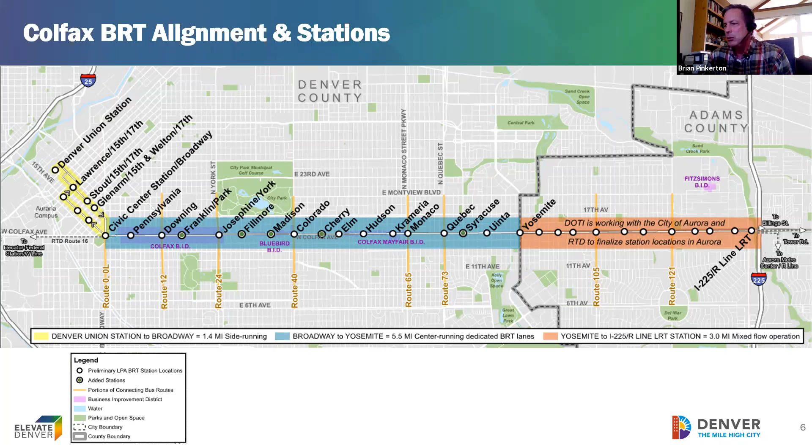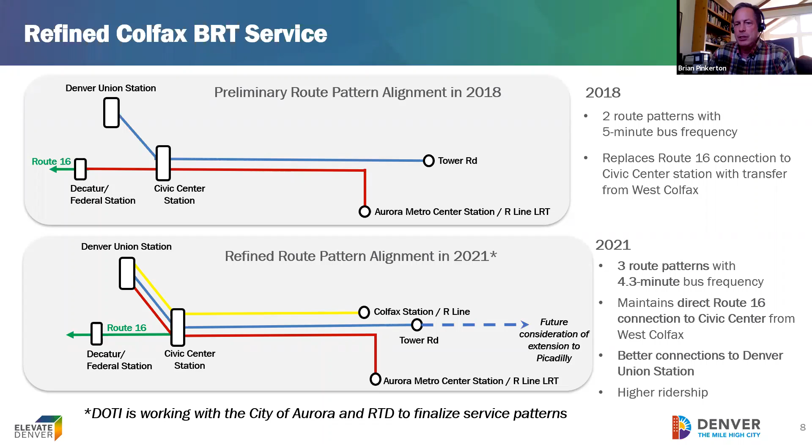Go ahead and put the next graphic in there. You can see now that the Colfax BRT will have 3 destinations in Aurora: at the R line at Tower Road with future consideration of an extension to Piccadilly, and at the Aurora Metro Center Station. All 3 of those lines on the west end terminate at Denver Union Station, and Route 16 covers that traffic to the west.

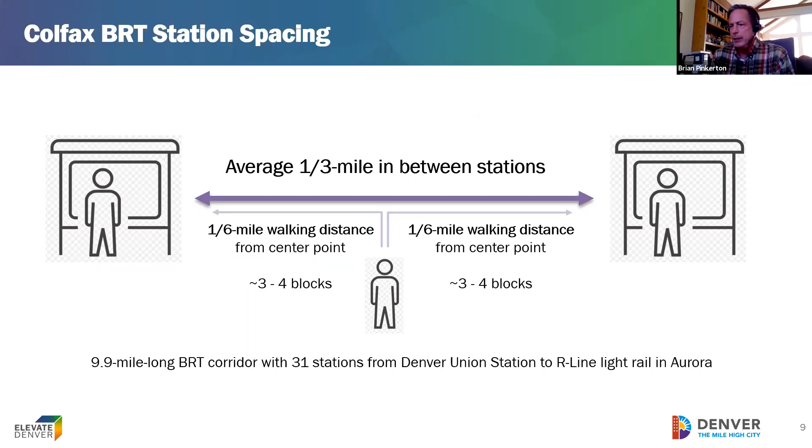Again, we've covered this, but in the center running section, it was very important to us to have a reasonable distance between stations. There are other considerations too, like whether there's a north-south route at the location that makes sense to connect to, or a signal at the intersection so traffic can stop, which is very beneficial to a station location. But in general, it's about an average of a 1/3 mile between stations, meaning a 1/6 mile. If you walk to Colfax or get there somehow and end up halfway between stations, you're only about 3 or 4 blocks in either direction to a station.

There are 31 stations between Denver Union Station and the border. Span of service is 24 hours a day, 7 days a week. The frequency during the day would be approximately every 4.3 minutes on average. At nighttime, it would expand to a 20 to 30 minute headway.

Miles, did you want to cover this one? Yeah, Brian, I'm happy to.

And that concept went into the center running format and brought us to where we are today, which will really start to identify the concepts, the engineering, the environmental work that needs to happen. Then as we move into the 2022 timeframe, looking at coordination with the FTA on some of the small starts funding components, and looking at final design within the 2023, 2024 timeframe.

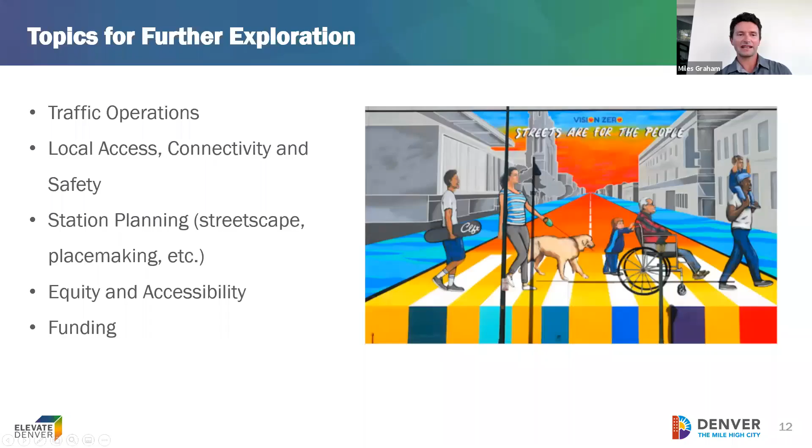Alex, thanks for buying me a little time. There were some chats coming in. A really good question about being interested in learning more about safety, especially with regard to having the stations in the center of the street, which can be a little more counterintuitive. But Sid, if we back up a few slides to the overview graphic that Brian was just talking about, you'll see that by having the center running stations, it will actually shorten crossing distance. If we go one more slide, it will actually prevent folks from having to cross all of Colfax at one time. It will create a refuge for people crossing the street to pause in a very safe center island station before completing their trip across, which will improve connectivity across Colfax, which right now can be a challenging street to cross at times. The designs we're going to look at tonight will really illustrate in a visual way how those center stations will function so they are safe and feel comfortable, because it's a concept we don't have a model for in Denver. So the visual, the image, speaks a thousand words.

We'll be able to talk more about the safety components, but this design does prioritize safety for all users. As you can see, it creates signals where people are allowed to turn left instead of having the free left turns you'll see on Colfax today. Left turns are one of the leading causes of vehicle crashes, so that's a key component to this plan as well. Taking the buses into a dedicated lane in the center will reduce conflicts between parking on the side of the street and the current bus service that runs on the side with vehicle traffic today. So a lot of different components that will improve safety.

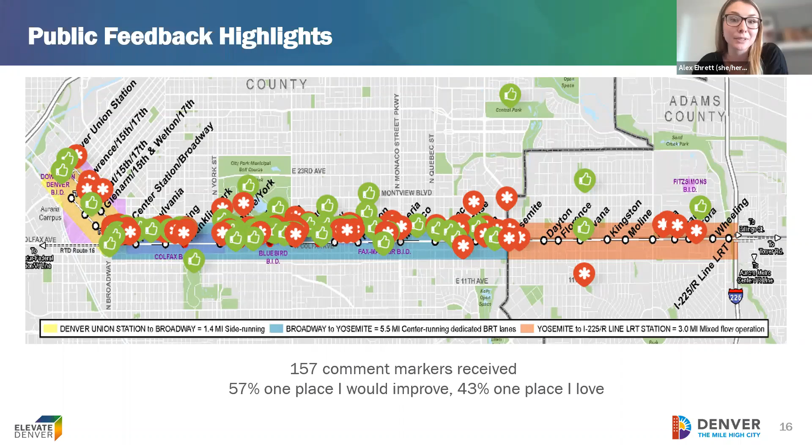Go to the next slide. If you took the survey, you know that in addition to standard multiple choice questions, we also have a map where you could place a marker of a place you'd like to improve and a place that you love. We've received 157 comment markers, and the split is about 57% places you'd like to improve and 43% places that you love. So we can dive into what these actually were flagging.

So what you love, there is of course a ton of strong support for the local businesses. A lot of those specific locations were places where cafes, restaurants, shops, or theaters are located, and a lot of that was really emphasized between Josephine and Madison stations. In addition, people really supported a lot of the existing bike lanes and pedestrian improvements where they have been made, calling out the Syracuse, Pennsylvania, Josephine, and Fillmore intersections. There was also a lot of support for the proximity to amenities and services that the current bus service provides and the connections currently available.

In terms of where you'd like to see improvements, there was overall a desire to improve traffic flow, especially pedestrian and cyclist safety in many locations. Some people indicated they'd actually had an accident at a location, or didn't feel safe crossing the street, and that's incredible feedback for us, very helpful. There were some of those intersections called out that you see on the screen. There's also a strong interest in streetscaping, with specific locations where there seemed to be opportunities for enhanced lighting, improved bus shelters, and placemaking elements.

Some of these locations were identified as, you know, this isn't a great place to wait for a bus, I don't feel super safe here, or this specific shelter doesn't provide very good protection from the weather. So all of that feedback has been helpful for those specific locations identified, a couple being Krameria, Monaco, and the Syracuse stations.

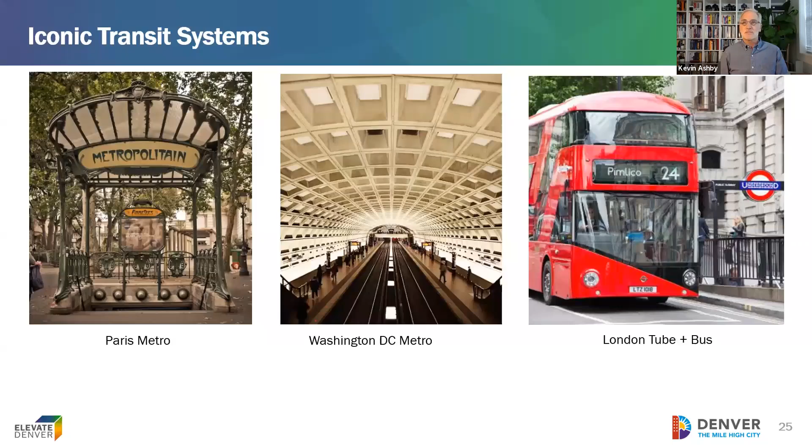Again, maybe not get into all the details here, but there's been a tremendous amount of input that's informed the designs as we've developed them so far. So some of the real key concerns that we heard a little bit earlier, shelters for protection, will demonstrate that, I think. Lighting and security are key.

Information, and also the connection that this will create for a number of neighborhoods, as well as the 2 cities that it connects. And I'm always inspired because if you think about using public transit, you literally use half the amount of energy when you ride the bus versus using a private car. So the more we can make this enticing and comfortable for people, the more successful it will be.

Again, some of the design objectives that we've touched on in the previous slides, but what's really important, I think, is creating a great user experience for everyone in the community with this project.

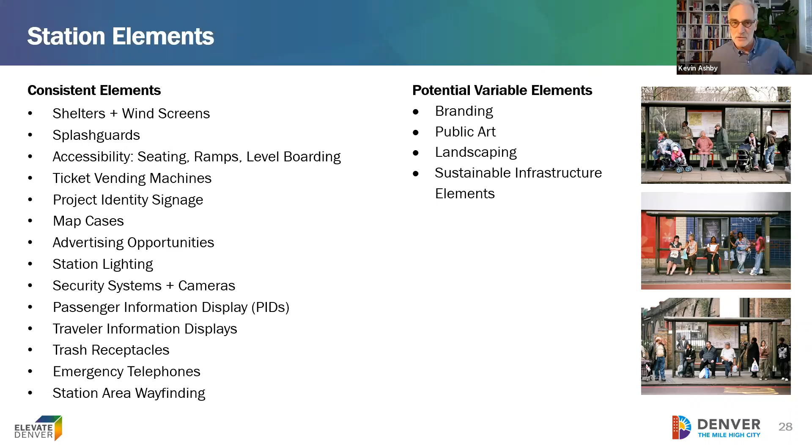Building off of what Kevin shared in terms of what elements could potentially be variable in the design, we know this is something communities are likely to be excited about. So we wanted to ask a poll question: what station elements would you be most eager to customize in your local area? The options are branding, public art, landscaping, or sustainable infrastructure elements.

Just around 56% of you have participated so far. We'll give everyone a couple more seconds, and then I'll share the results. Right now it's looking like public art is coming out ahead.

Thanks to everyone who participated. I'll share those results now. It's a bit split - I think people are really excited about the public art opportunity as well as sustainable infrastructure elements and landscaping. We'll have more to come on branding, but this is helpful for us. Thank you to all who participated.

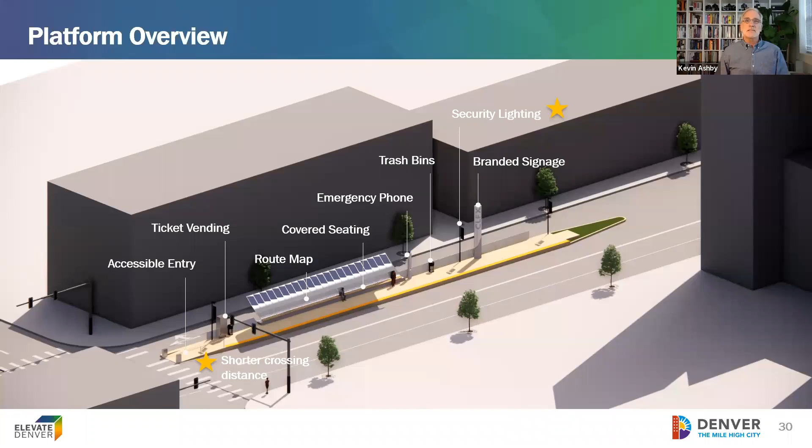As we were developing the themes, we wanted to tap into our unique place in the world. So the thematic ideas were built on the region, on the cities, Aurora and Denver, and then on Colfax Avenue itself. We developed these themes hoping they resonate with people and are evident, so that when people are riding this BRT, they know it's part of our community, our city, and our region.

We had 3 themes that we developed, and I'll describe them in more detail as we get into them. One was Rewind, which looks at the history of Colfax. The second was Rays of Light, picking up on the idea that Denver is one of the sunniest cities in the United States. And then also Playful Landmarks. These are pretty broad, but they allow a lot of latitude as we've been developing station ideas.

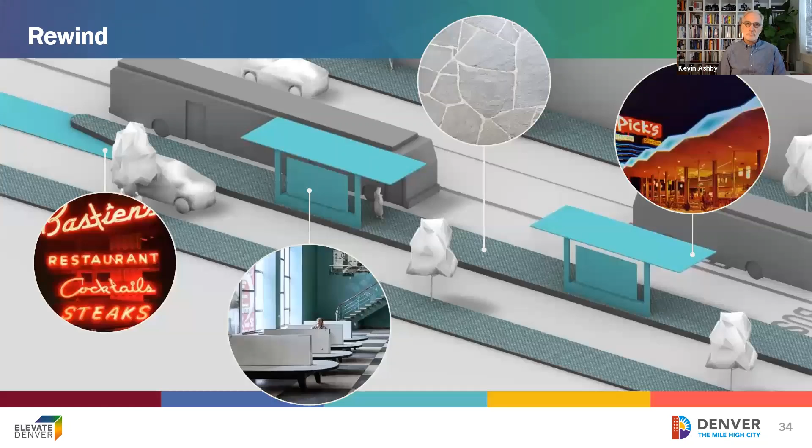The notion of Rewind acknowledges the history, celebrates movement, since Colfax has always been about moving towards the west, and the transitions that have taken place over time in Colfax. At the same time it begins to look at modern architectural ideas. This is very abstract, but there's a lot of materials we'll be looking at in terms of steel, concrete, stone, wood, glass - all those things are really open here. Today I want to emphasize that all of our studies are still sort of white and abstract. There's some materiality implied, but we haven't really gotten down and fine-tuned that yet. We haven't begun to look at color and those sorts of things yet, because I think those will tie in very much with branding at the end of the day. So we're working through that.

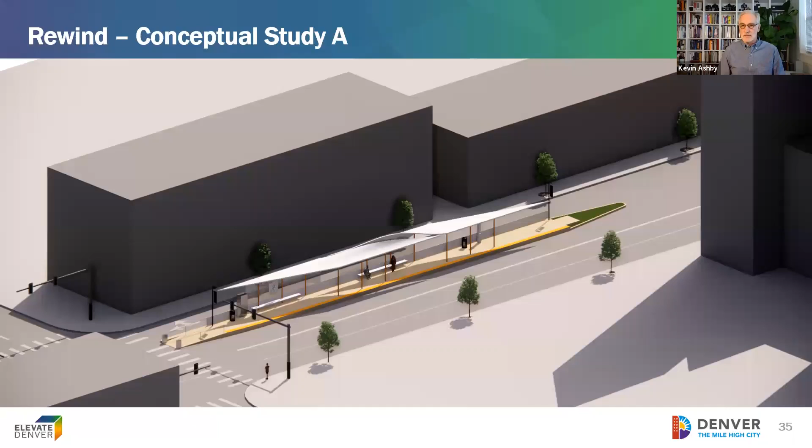So our first option, conceptual study A, has a very strong roof form. It's linear, suggesting movement and transition. It's also highly modular, so we can make the canopies longer or shorter based on the particular activity in a given station.

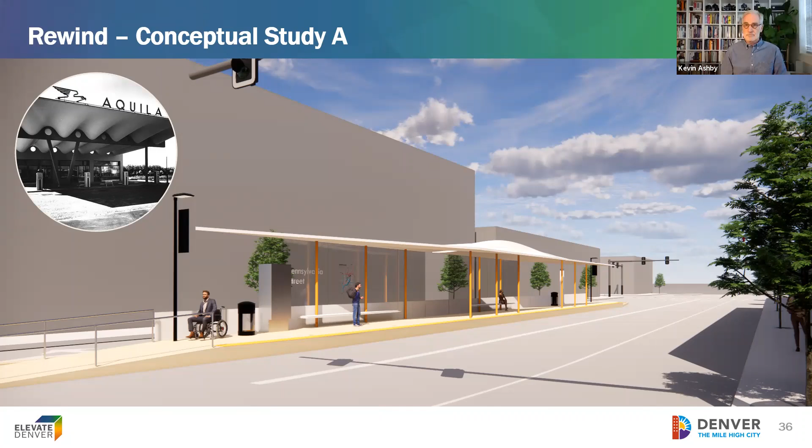This is looking as if you're coming across the crosswalk up onto the canopy. You can see there's a really good amount of protection from sun, rain, snow, sleet. We've got windscreens all along the back side of the canopy and splash guards all along there as well. So it's very open and secure feeling, but at the same time provides a great deal of protection. That's something you'll see in most of the solutions, actually all of the solutions.

This is looking now to the west. We haven't modeled all the background yet, we're still keeping things abstract, but if you know the city, you'll know this is Pennsylvania Street. So you see how these two canopies relate and create a dialogue across the intersection. It's almost like, in this case, these are sort of clouds moving down through the avenue.

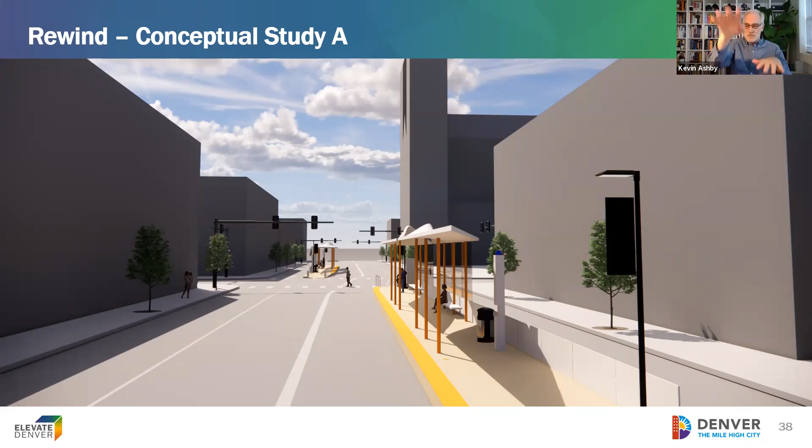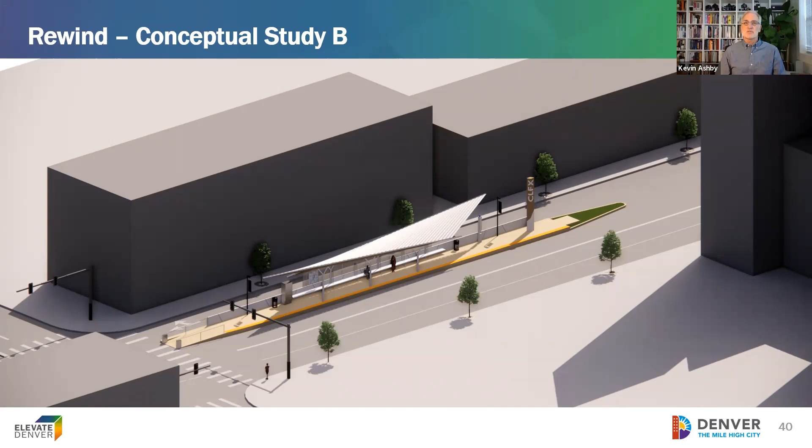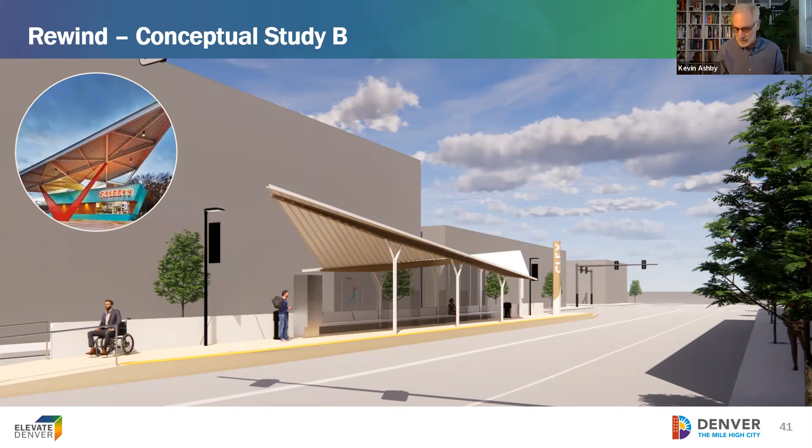Again, the little bubble in the upper left, you can see some of the precedents we've been looking at, but interpreted in a new way. There's really great weather protection with this option as well, and really great transparency. So if you're on the platform, you can see, you can be seen, you can say, oh great, there's a coffee shop over there. I know another bus is coming in 4.3 minutes, I'm gonna run over and get a cappuccino, I'll be back.

Again, looking from that crosswalk view, the way this roof forms really invites you in. So you can be out at the ends if you want a little more openness and connection to the environment, or you can move in closer where it's a little more constrained and covered.

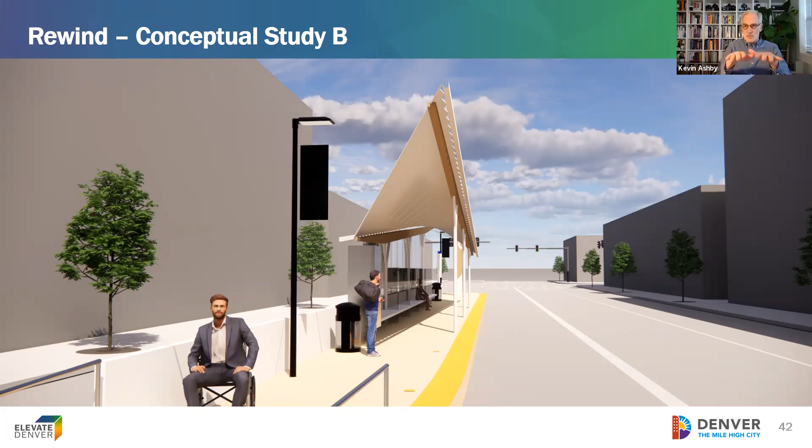Again, looking west and seeing those two canopies and how they create a dialogue and a sense of movement through the corridor.

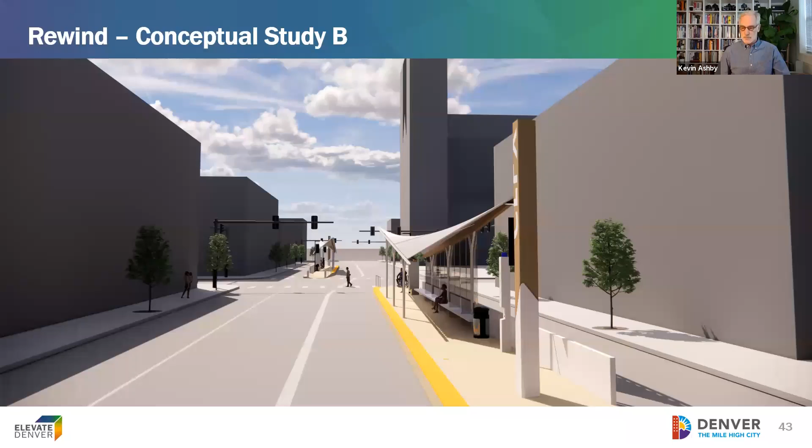The second theme, we'll have two options or two studies here, was Rays of Light. Again, celebrating the notion of Denver and 300 days of sunshine every year, as well as light is fast, right? And I think that helps reinforce the notion that this is going to be a really efficient and effective BRT system.

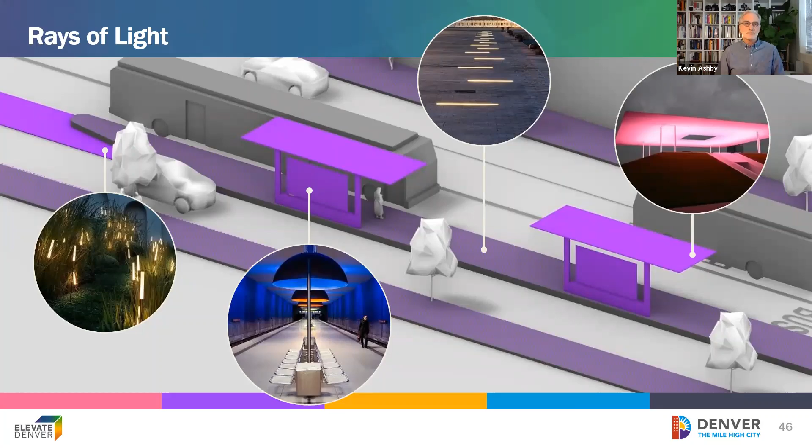Again, some of the early abstract thinking, but you can see the different ways that light may be used in some of our inspirational images here. We're thinking about these being horizontal and linear ideas, connected and continuous, and light may be used in different ways, both sunlight and artificial light, as we develop the designs.

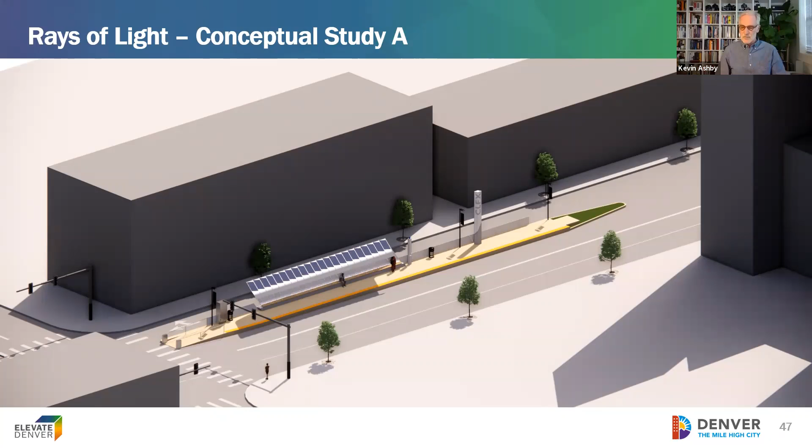This first concept is really highly modular. You'll note on this little study, there's a series of photovoltaic arrays that we're evaluating. Initial studies seem to indicate that each station would have enough PV to support its own electrical needs, which could be really unique and exciting. We're looking at that for all the solutions. Here it was just really obvious to add it and pretty easy to add it in, so we wanted to demonstrate that.

Next slide. Again, if you look at that image on the upper left, these streaks of light are almost like headlights moving down a dark street in the evening. We've kind of taken that and begun to pull it through this canopy that wraps and provides protection. There's lots of options, and I think that's one thing I want to stress. We've got an initial idea here, but there are always variations and hybridizations and things we can look at. So as we're getting input, we'll continue to build on that richness of the design going forward.

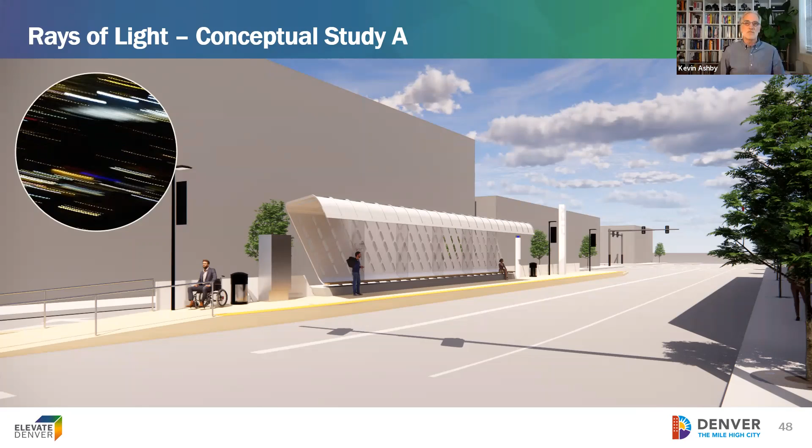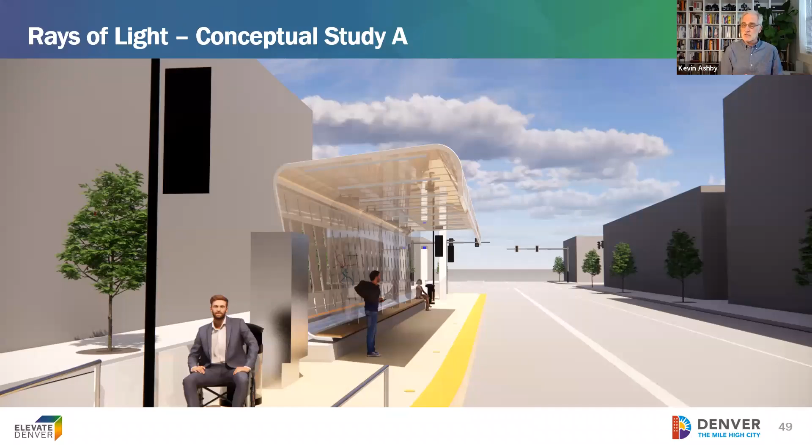This is a really strong contemporary design, and in a nice way it contrasts with some of the history and Colfax. This slide gives you a good indication of the amount of coverage. This option might provide more protection from sun than some of the others, but there's always going to be plenty of weather protection.

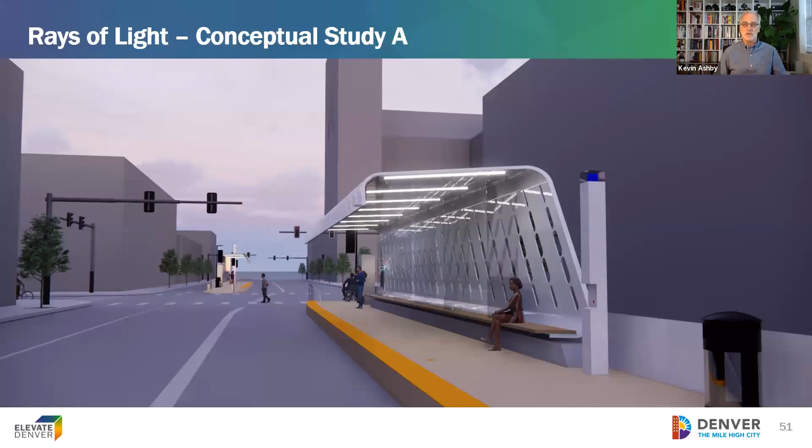So this is concept study B. It's a strong arch, and the canopy above you is hung from above. We were envisioning kind of the sun rising, coming up over the horizon and beginning to spread light down Colfax.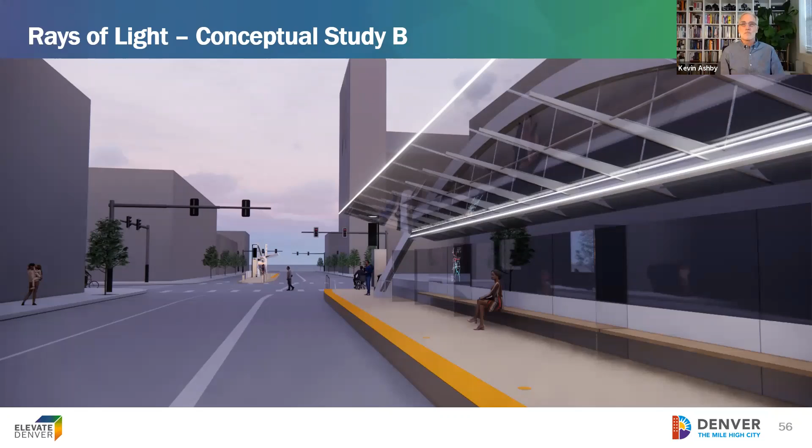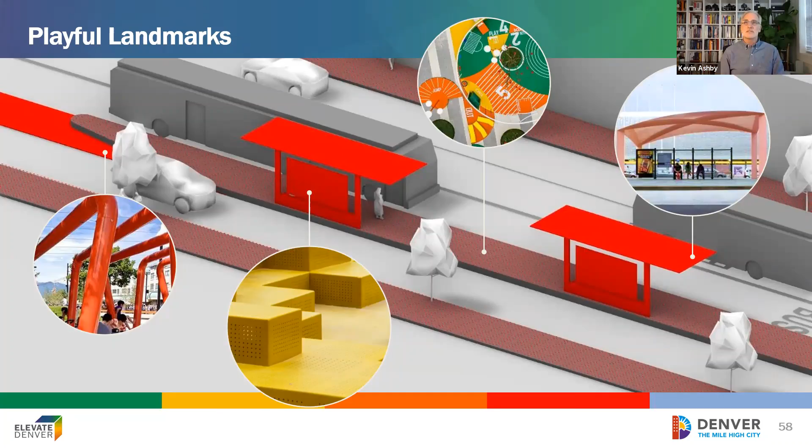Next theme is playful landmarks—looking around Denver at some of the icons that suggest play. Thinking about Colfax Avenue as a place of fun, depending where you are on the avenue, where people go to socialize, looking for entertainment, shopping, dining. The idea of these playful landmarks ties into the history of Colfax Avenue. So we're thinking about whimsy, liveliness, fanciful, maybe some lighthearted ideas.

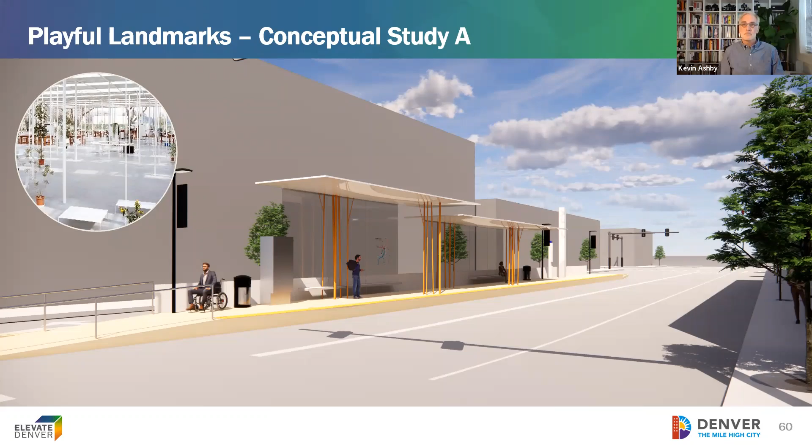This is conceptual study A—a simple and modular idea. Moving down to street level, the notion is taking the vertical structure supporting these canopies and breaking it down into smaller pieces, almost like a series of birch trees, or clouds going through, or maybe mist in the mountains. It really relates to the region—the mountains, but at the same time city parks—so maybe it's a bit like a linear park running down the center of Colfax. The shelter still provides a lot of coverage.

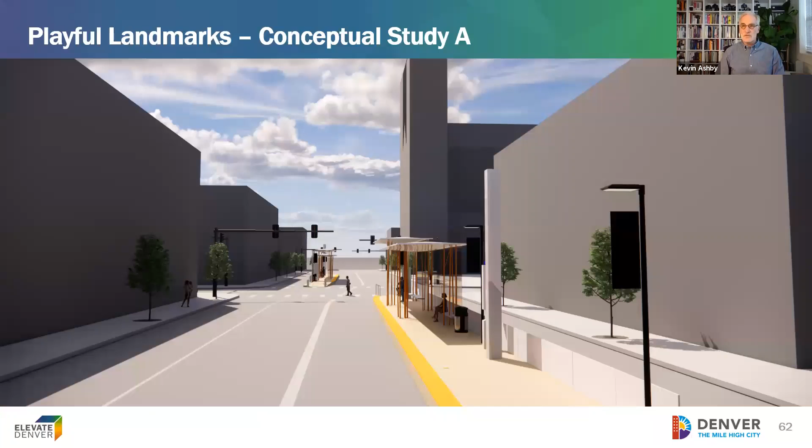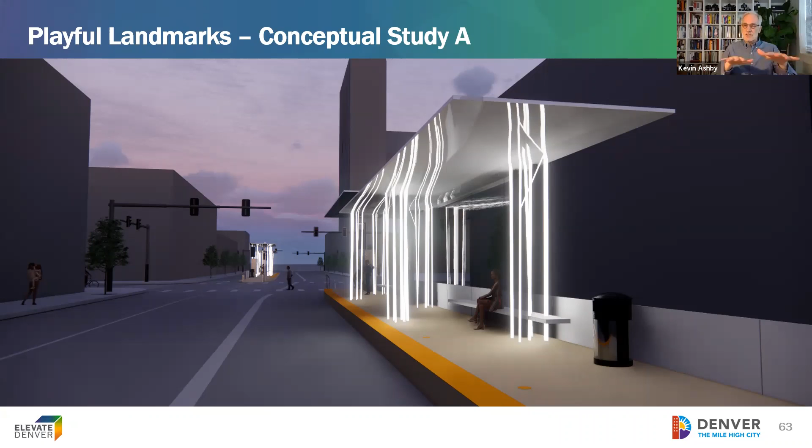And you can get the sense here of maybe the little cluster of trees that are supporting the canopies. This is a view looking west, but again, they're providing a lot of shelter for patrons on the platforms. That dusk view, here we're kind of looking at maybe that ceiling plane, that ceiling surface, potentially being a little bit reflective, and that would really reflect the action and movement of the city around it, whether it's people or cars or buses, and provide a sort of sense of kinetic movement against this reflective surface.

Next, concept study B for playful landmarks. This one, we're kind of abstractly thinking it's almost like bus routes on a map, and we've kind of taken those things and extruded them. It's also modular, it can be longer, a little bit shorter.

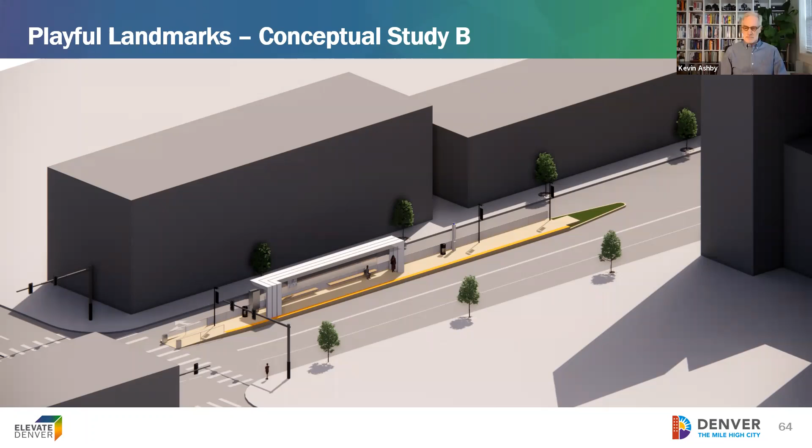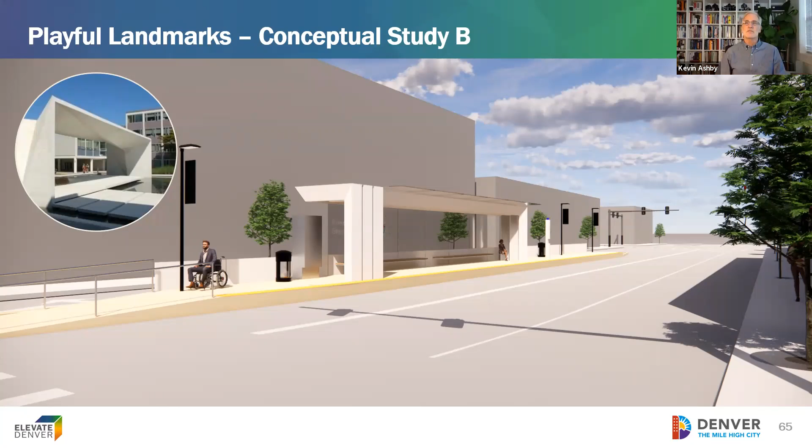That's kind of that view from street level. It's very open and fairly dynamic. We're still looking at the amount of what's solid and what's sort of really open here, but it gives a good idea. Looking in again as you're crossing the intersection.

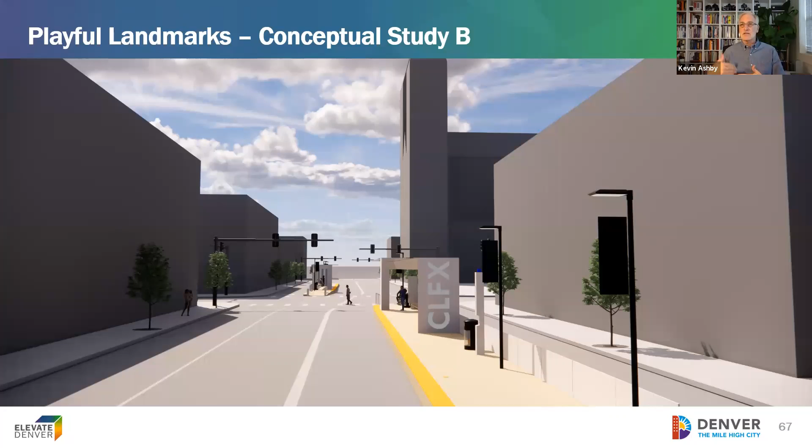The form and the structure have really merged in this particular solution. I think the panels could potentially provide weather protection, but also an opportunity for branding or the inclusion of wayfinding signage and additional lighting. You can kind of see that at night as well.

So to bring it all back together, we've really looked at a variety of options. I think we're exceptionally pleased to be able to share this kind of initial design thinking with you today. There's those three broad themes: rewind, and rays of light, and then playful landmarks. There's two studies of each, so it shows you that things are still fluid, and there's a lot of variety, and opportunities for hybridization, kind of mixing things together. So we're looking forward to the discussion and feedback.

And I think there's one final comment. I really want to thank the city for their desire to create an inspired solution for the Colfax BRT and for Denver. I think it's really an exciting opportunity. So Miles, back to you.

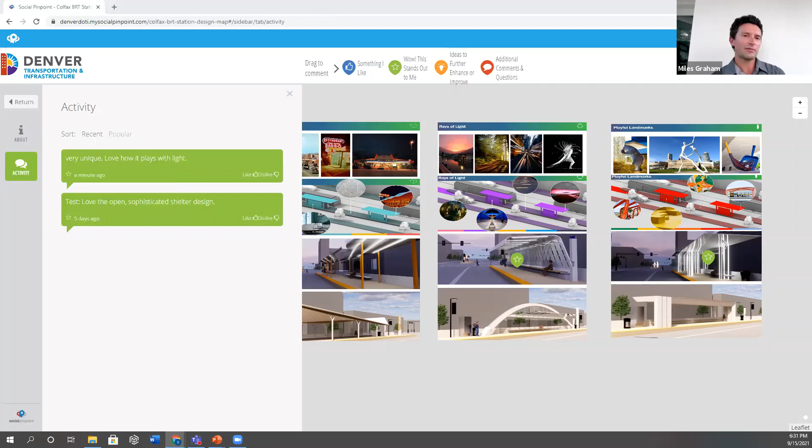Questions about the weather: will these different station concepts relatively equally provide protection from the elements? And do we consider things like seasonal direction of glare for safety, and how do you incorporate that type of design component into some of these concepts, and then how does that translate into the ultimate detailed design?

We've been hearing a lot of public feedback, and shelters and protection from the elements has been really key, so that's been baked into all these solutions. In terms of a continuous splash guard at the back of the platforms, weather screening extends from that splash guard up typically to the top of the canopy on the backside as well. We're beginning to incorporate wind screens along the platform that provide a space for people to tuck into if the wind's blowing east or west.

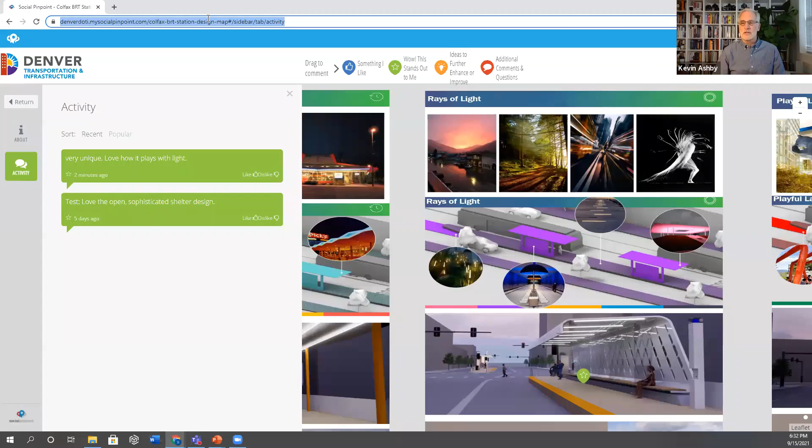Stay out of the way. Once we begin to really hone in on one of these, we'll fine tune all those smaller details, the type of glass or plexiglass, the amount of transparency. For example, in the one ray of light option, we've got a glass canopy. If everybody loved that and were to go forward with it, we'd figure out a way to build in the amount of frit so it's providing a lot of shade but still that sense of openness. Those other details will be studied as we refine the designs further. But at a high level, so far all these have really addressed the key weather protection, protection from sleet and snow as cars and buses go by.

Good to know, and that speaks to the importance of future meetings at the neighborhood level to go more in depth on some of those details. We've also gotten a lot of questions about safety, and because the center median stations are a relatively new concept, especially here in Denver, we don't have anything comparable to look at. In future meetings this fall we'll go in more depth on these concepts and show how shortening the crossing distances makes it safer to cross Colfax.

Right now, to cross Colfax you've got to cross 4 lanes of traffic, a turning lane in the middle, and 2 lanes of parking. It's quite a stretch, especially for people with disabilities. By shortening that distance by effectively half or more, it will make it easier for people to cross. If they're not able to move quickly and need to wait for a second cycle of the traffic lights, they'll be able to do that. Otherwise, there'll be plenty of time in a single traffic and pedestrian cycle to stop, pause, and make sure you can cross safely. It'll also slow down traffic to the speed limit, which facilitates a safe crossing. So in future meetings we'll go deeper on the lighting, safety, weather and elements, and how these designs will address that.

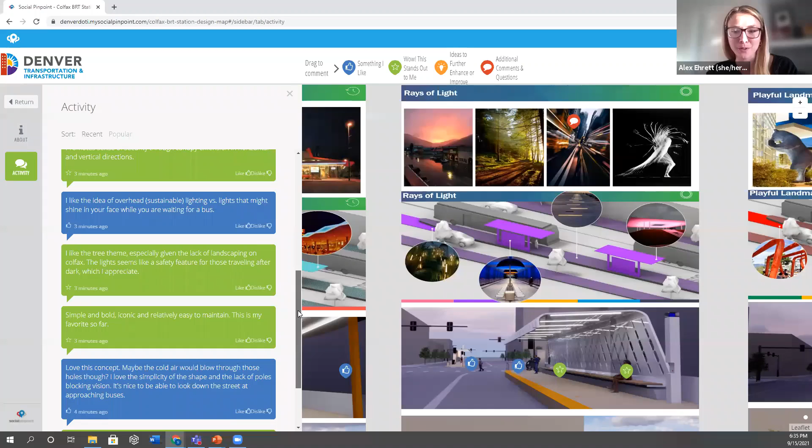Yes, thank you, and thanks to all of you so much for participating. We have a really good mix of the different types of feedback we're getting. In terms of feedback on the playful landmarks, we're seeing support for the structures mimicking trees and the poles serving as lights reflecting on the ceiling, being such a magnet for attention to draw people and get them considering riding the buses. We also got some concerns that the playful landmarks may not be able to stand up to the use of the corridor given how intricate the designs are. So lots of good feedback coming in.

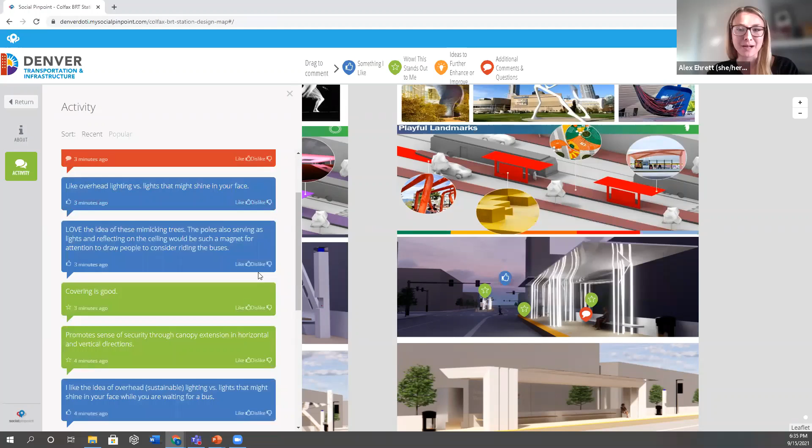And also highlighting some of the rays of light designs, people are highlighting that they think some of the designs will help promote a sense of security through the canopy extension in the horizontal and vertical directions. A lot of people are really liking the idea of the overhead lighting featured in many of these designs.

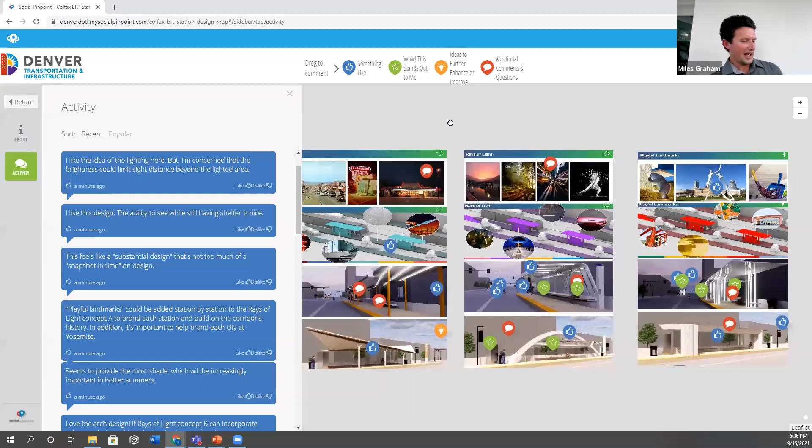Terrific, yeah, this is great feedback. We'll be keeping this survey open as we go into some of those neighborhood meetings this fall that I was mentioning earlier. A couple other questions coming through in the chat - really quickly, a question about branding and what that'll look like. We're not there yet, but the spoiler alert is that we will be dedicating some time in this process to get into branding and get community feedback on that as well.

As you can see, this is such a unique corridor, we're really looking forward to this discussion. Brian, this may be a question for Amber, but I'll flip it to you first - question about the number of intersections we're going to see in the corridor with transit signal priority for the buses.

Our current plan is really to use that as a tool to allow the buses to jump in front of other traffic when they need to change from one lane to another. That would not necessarily preclude it on other parts of the corridor, but I think with the dedicated lane, really good signal timing, and the tight frequency of service, a good traffic signal timing along the corridor would really allow that bus to get the priority it needs, especially in that dedicated lane.

Excellent, thank you. And one more for you and Susan - maybe RTD would want to weigh in on this one. Question about snow removal on these stations and how that would be managed.

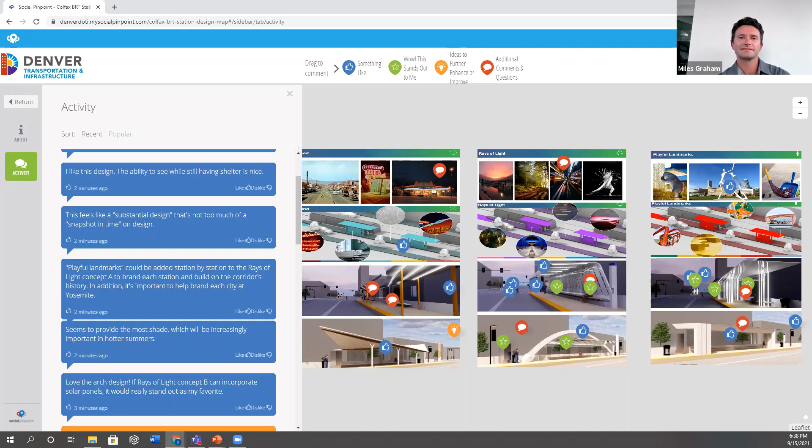Yeah, I can start with that for sure. I would anticipate that snow removal at the stations would take place just as it does at all of our stations, where we have facilities folks dedicated to do just that task. Certainly on really heavy snow days, that happens a little slower than all of us would like, but they are always at work on any snow day to make sure that happens. This would be accomplished in the same way.

Excellent, and one more question on amenities at the station - really a couple good questions on safe bike parking and how we'd be able to potentially incorporate bike boxes. Would they maybe need to be on the side of the street or in the center of the street, because we know there's constrained space in those center stations? How do we think about those types of features?

Maybe Kevin, I think you might want to take a first crack at that one in terms of managing the limited space we've got there. Yeah, and I think I'd like Phil to weigh in on this too, but most of the discussions thus far have been about people taking their bikes on the buses or attached to the buses as opposed to leaving them somewhere. The platforms are relatively narrow. There might be the potential to look at getting some shelters at the very back end of the platforms out of the way. But Phil, maybe you might have some thoughts on that as well.

Sure, Kevin. And of course, most people who use a bicycle to get to the bus from their origin would also need the bicycle to get off the bus and get to their destination - kind of the first mile, last mile connection, either by walking or bicycling. So as Kevin said, we're anticipating inclusion of onboard bike racks that will accommodate a couple of bicycles and allow exactly that kind of first, last mile connection.

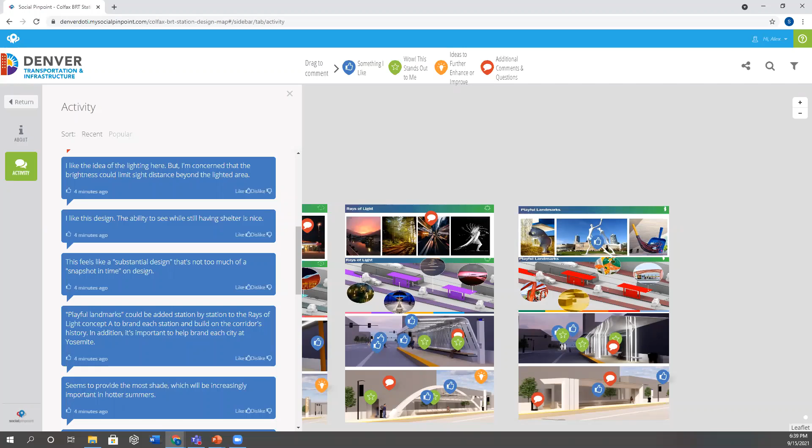Excellent, thank you Kevin and Bill and Alex. It looks like we're still getting some great comments - what do we have that's new and exciting? Yeah, so people are really interested in the lighting, there's a lot of support for how lighting is incorporated throughout. There's also some momentum for potential solar, and there's been a couple mentions of solar within the rays of light and a lot of support for that. I think people are really eager for the protection that could be offered from some of these shelters in terms of protection from the elements. There were some questions about the holes.

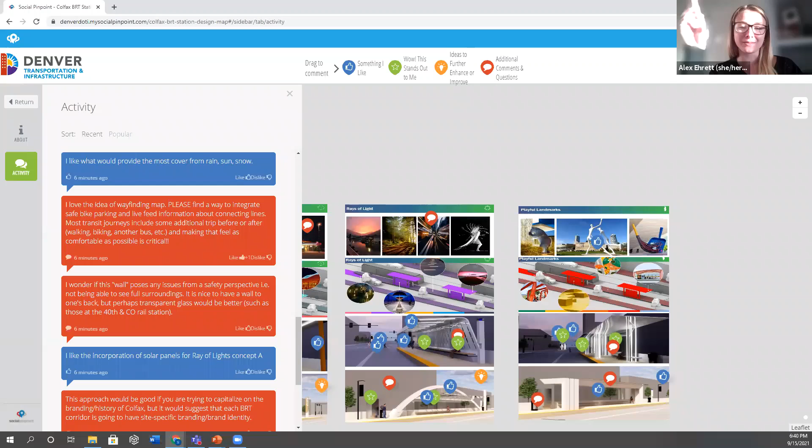So for example, in one of the studies for rays of light, it shows some interesting design, including some holes in the back of the shelter itself where people would sit behind them. There's some concern about whether this would allow rain or cold air to come through. So just some things to consider there.

And then a lot of support for whichever design provides the most shade, especially in the summer months, a break from the heat and the persistent Denver sun. Some support for wayfinding throughout, making sure people know when buses are coming and exactly where they're located, as indicated in our survey. Also some comments around branding and how the different branding elements for the BIDs and the communities the stations are located in will fit in with these designs.

Overall, it's looking like a lot of positive feedback and excitement around a number of the designs. There's a lot of good opportunity, as we mentioned earlier, for the combination of some of this feedback. None of these are totally final, and that's why we're coming to you asking for this feedback. So really highlighting the things you like in each of these themes will be most helpful for the team as they try to incorporate those and see where we can achieve what the public is asking for.

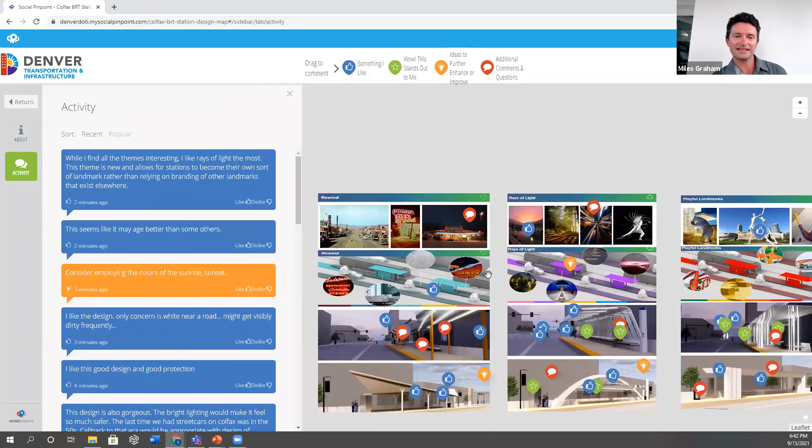Thanks, Alex. And Brian, a good question for you here in the chat: really a love of the wayfinding, some of the real-time info, but especially the sustainability elements, the energy generation from potential solar systems. How would we incorporate these station designs into meeting the city's sustainability goals?

Certainly we have a number of goals as it relates to sustainability. I think that'll be a factor we look at. We do have to consider the maintenance aspects and the capital cost of putting those features in place, but the city is highly interested in being innovative and looking at ways to reduce our carbon footprint. So I think it's something we're just going to be looking at as we get further into the design process.

Absolutely. And another good topic for discussion as we get into some of those more detailed planning workshops is community prioritization of those green elements. Also a good plug for why this project is such a good candidate for Colfax, because you've got 20,000 people riding the bus today. With a system like this, it can move even more people, meaning people will be able to move more efficiently through sustainable transportation. That's probably one of the biggest environmental impacts and benefits we'll have with this project: being able to shift trips from vehicles to transit.

Yeah, and when you do that, you literally use half as much energy, which is pretty phenomenal. At the highest level, that's pretty significant. But I think these stations are larger and have the capacity to be even larger than your typical bus stop, so more people are going to be able to get in there and feel protected when it's raining, snowing, or sunny. And hopefully that'll increase ridership.

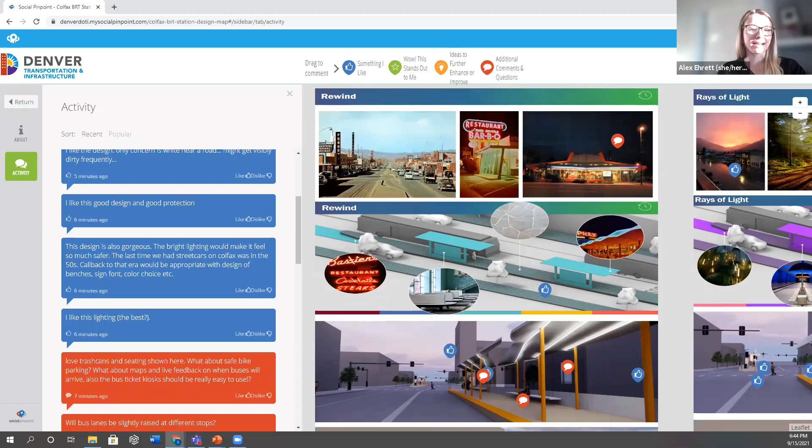Alex, I want to toss it back to you and see what additional comments we've been seeing on the fun stuff, the design itself. Yeah, so we do have a question, just from somebody wondering if the bus lanes will be slightly raised at different stops. So wanted to throw that back to maybe Bill and Kevin, if any of the lanes will be raised.

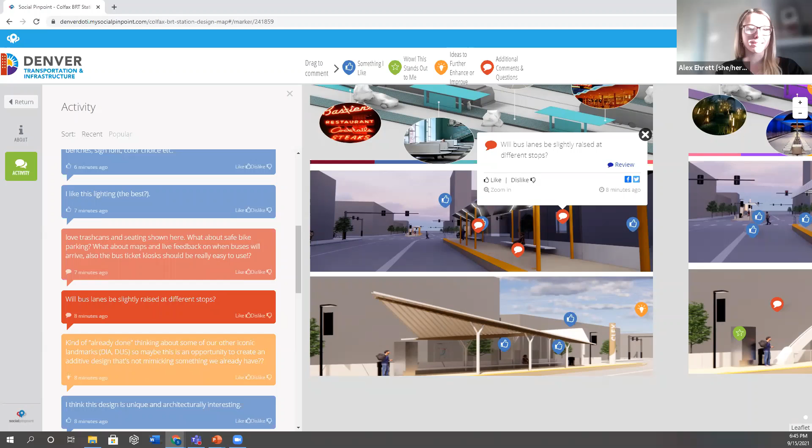I think, just to be clear, the platforms that people are standing on before they get on the bus are all raised 14 inches, so it provides level boarding. If you've gone from street level up to the platform level, you get directly into the bus. Is that what the question was about? I think so—this question was put in a general spot on one of the designs, and I was just wondering where the raise is going to occur. So I think you answered it.

Thank you. Yeah, and I might just chime in: the lane itself would not be significantly raised over the traffic lane adjacent to it. We'd need to keep those on a relatively level plane in case there need to be shifts around for construction or if there's an incident. But Kevin's exactly right—this would be really nice, that once you're on the platform, you literally just walk straight onto the bus without any steps.

There would be some paint and markings in the bus lane to indicate that that's the bus lane. And the real sweet thing there is that level boarding, so people on wheelchairs, people with strollers, it'll be a much easier boarding and unboarding experience there. Correct.

It's probably worth mentioning too that the transition from street level to platform, as I alluded to earlier, is actually less than a typical barrier-free ramp. So it's actually easier for anyone to navigate if they have any sort of mobility issues. We're trying to make this as accessible as possible.

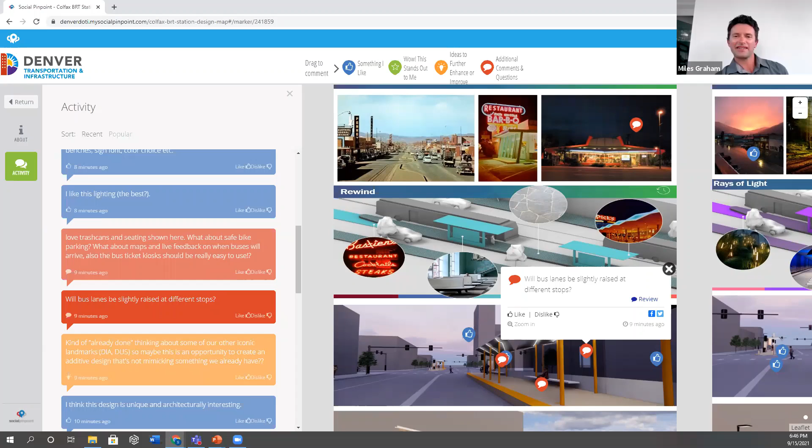We just got a question in the chat on this theme, thinking about overhead lighting and making sure there's easily identifiable lane demarcations to help drivers and bus drivers know what the correct right-of-way looks like. Will there be some overhead signalization to dedicate the bus lanes as well for folks in cars?

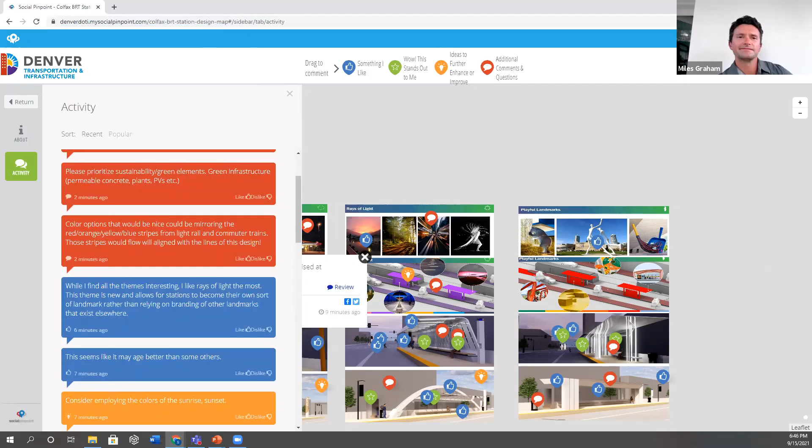Brian, I guess this is maybe a question for you - whether there would be overhead signs or overhead signals designating where the buses and cars would be. Precisely. We haven't gotten to that phase of the project yet where we've worked out that sort of signage. I don't know honestly yet. There would certainly be markings on the pavement, certainly signs on the side of the road, so it'd be very clear to cars and buses where they're supposed to go. In terms of any kind of overhead sign, certainly at the intersections, it would likely be a sign next to the signal. I don't know that there would be any other overhead demarcation.

Perfect, Brian, thank you so much. And this is another city question regarding connectivity to the existing and planned system, for this major transit investment that moves so many people on Colfax, connecting to some of the light rail stations, Denver Union Station that you showed on the map. How's the city thinking about connecting to existing and then future planned high capacity transit systems and BRT corridors?

Well, this is all part of our mobility plan, but I'm going to turn it over to David Krutsinger to weigh in on this one. Sure. We know big picture that the city is growing. We're going to be adding a lot of residents and a lot of jobs over the next 20 to 30 years, but our streets are not going to get a whole lot wider in most of the city. So transit is a key solution to moving more people, as we'll also be doing bike lanes and other things like that on parallel streets to increase the movement of people and make it as easy for folks to get around as possible.

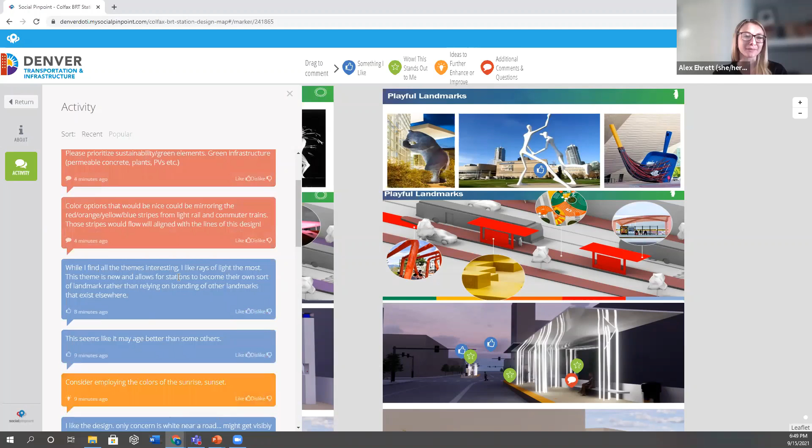Yeah, so there have been some creative comments around employing the colors of the sunrise and sunset. A couple of people have flagged incorporating reds and orange and yellows to align with some of the designs, so that's some fun feedback. And then there's also been a couple of comments wondering, depending on which design is chosen, if any of these themes or where we end up going is going to fit within the timeline that has already been established. I think there's some concern that, well, these look great and people are excited, but they want to make sure that they're not extending the length of time before BRT is available.

Awesome, Alex. And Kevin, one more question to you, and then we'll keep moving so we stay on time here in the agenda. We heard a little bit about - folks were really excited and liked the idea for real-time information, the off-board ticketing. What other types of amenities that you mentioned earlier can we expect to see here, just in terms of making these stations kind of more of a rail-like experience?

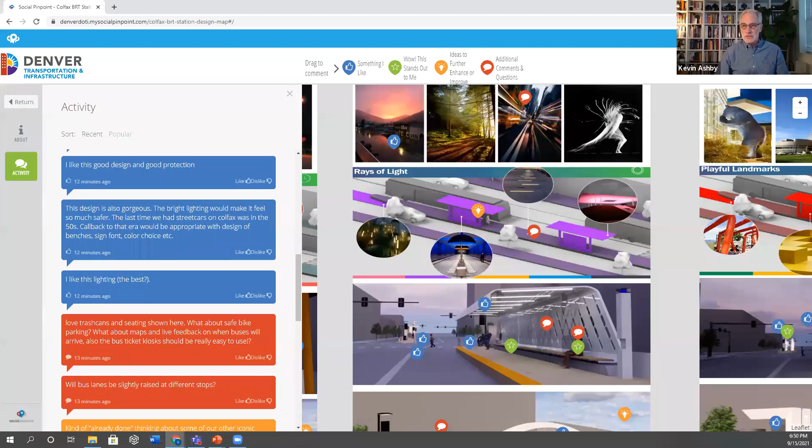Okay, well, there will be ticket vending machines on each platform. So as you come up at the top of the ramp, typically it'll be right there, so that'll make it fairly simple. We're going to have a lot of wayfinding built in, so there'll be information displays - we haven't incorporated those yet in the design, but those are essentially video monitors that'll give you real live update information on the flow of the buses. We'll have route maps at each station, and then we'll have general wayfinding maps at each station. So if you've alighted at this station, new to Denver, you can look exactly where you are in the city and figure out where you need to go.

There's going to be a lot of seating built in, so it'll be very comfortable. Hopefully nobody's ever going to have to push somebody out of the way to sit down on one of the benches.

The overall feel of these is going to be different from the typical station. The city's been very insightful about creating a more welcoming, more grand-scaled station, more like the rail stations we think of from the past.

That's a really good insight into what to expect. What makes bus rapid transit so rapid is that off-board ticketing—you'll be able to buy your ticket off the bus and get on and away you go. So Alex, unless there are any additional comments, I think we can move on.

I think we covered them, but as we said, we'll be keeping this open beyond this meeting, so if you have additional comments later, feel free to come back to the link and provide that feedback. The other item I want everybody to know is you have the option, in the bottom right-hand corner of each comment, to like or dislike it, which will help weigh some of the comments too.

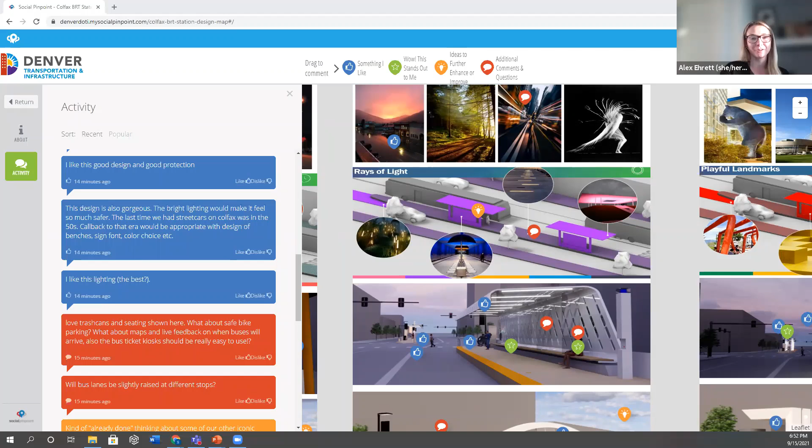Thank you so much everybody for participating. I'm eager to share your feedback with the team, and we'll take a close look at it. Thanks everyone, thanks Alex. And I want to like all of those comments—just at a glance, there's a lot of good input, so thank you so much for that.

This survey will stay open throughout the fall as we continue to share these designs with the broader community. We'll also be putting this information up on colfaxbrt.org very quickly, before the end of the week, so that it's easily shareable and accessible. If we move on to the next slide.

So where we go from here—we took a look at the schedule, and quick recap, the project schedule is moving very quickly. We've got good momentum and a clear, defined process for this effort, starting with the preliminary engineering we're seeing tonight, moving into the project development phase, getting our design finalized, and then getting this into construction so it can start moving people as soon as possible.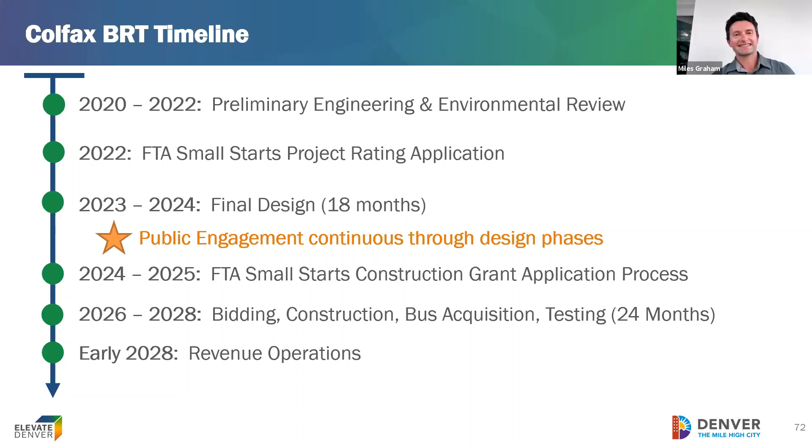What you'll see on the next slide is ways to stay engaged. We've mentioned a few times tonight that there will be station design workshops throughout this fall. We'll be going into more of a neighborhood-scale conversation, having focused discussions on specific station concepts and how they relate to different intersections. So stay tuned for more information on that.

The survey that Alex shared earlier is wrapping up, but it's still open until September 20th—so 5 more days to get your feedback in. You can access all of this information and check out all the amazing street art on Colfax at the virtual engagement hub, accessible via colfaxbrt.org.

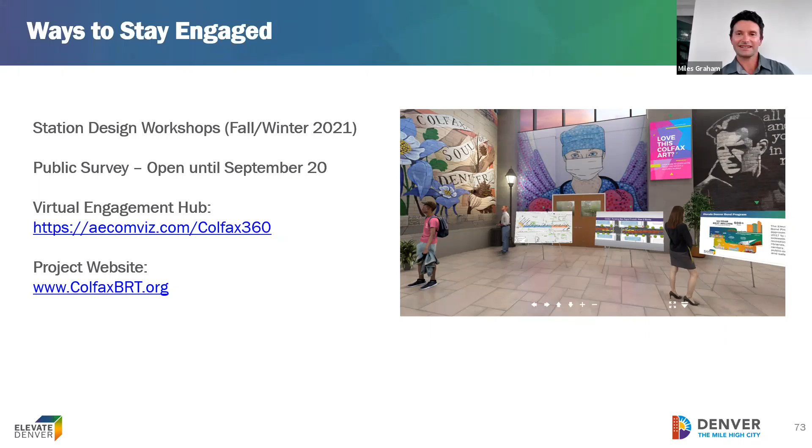So we're 5 minutes to 7 here. We've gotten a lot of great questions—my chat has slowed down significantly, but I want to open it up for any of the other project team members who may have had questions submitted directly to them that we need to address. Feel free to unmute and ask your questions.

Maybe we've addressed them all—I know we've covered a lot of ground tonight. So with that, I think we can wind things down. Alex, were there any additional questions you saw via the chat?

I think we've spoken to most of them. One that came in earlier was whether there are any opportunities to speed up the process, the timeline we're looking at. Brian, could you speak to whether there are opportunities to get this done and in action before 2028?

Well, we as a city are highly interested in doing just that. The sooner we get this in place, the sooner we start bringing some alleviation to traffic around the whole city as part of a larger transit system. So we're very motivated to do that.

There's a few complications, and allow me to be bureaucratic for a minute to make a big project like this happen. We do have other agency partners. The road is actually a CDOT highway, the transit service is offered by RTD, and we're seeking federal funding, so we have the Federal Transit Administration working with us. All are great partners, but it takes a little more time to get through each phase. We're right now in an environmental process, which is a federally mandated process for a project like this.